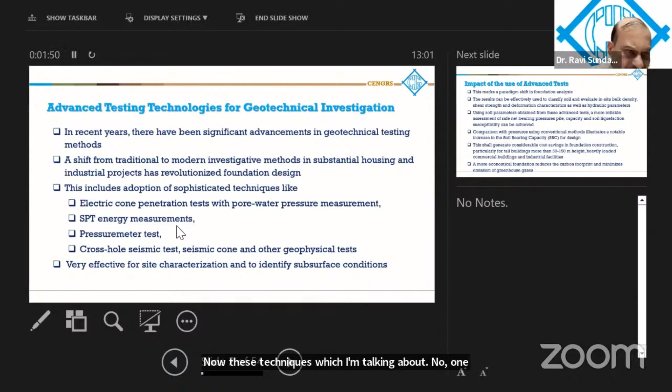These techniques include the electric cone penetration test with pore water pressure measurements, and SPT energy measurements. If you measure the energy being transferred to the SPT anvil, you can standardize it to a 60% energy transfer, normalizing the SPT measurement so the quality and consistency of the SPT improves.

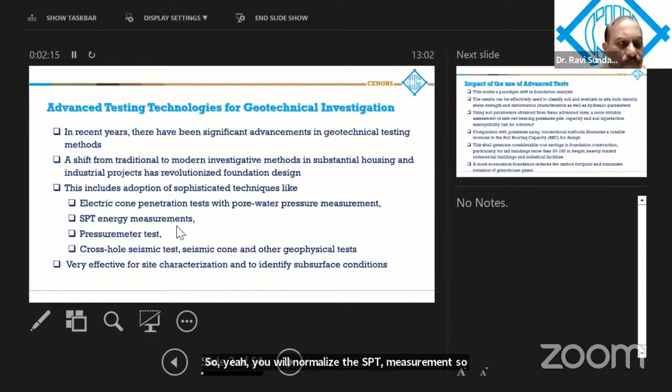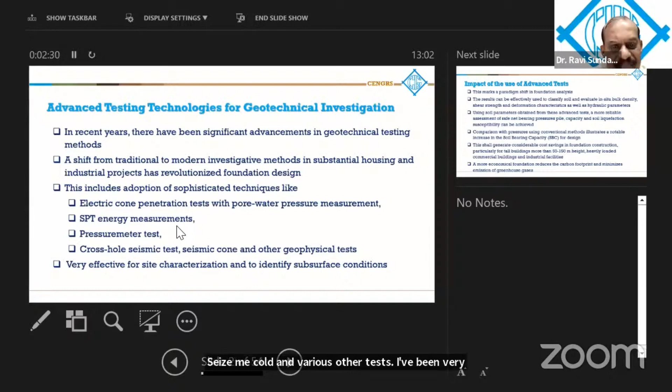Other tests like pressure meter tests, geophysical tests, cross-hole seismic tests, seismic cone, and various other tests have been very effective for site characterization and identifying subsurface conditions.

This has marked a paradigm shift in foundation analysis. The impact of using these tests is that now you can classify soils effectively and evaluate more realistic values of in situ bulk density, shear strength, deformation characteristics, stress-strain characteristics, and hydraulic parameters. Using these parameters allows a more reliable assessment of foundation behavior, including net bearing pressures, pile capacities, and liquefaction susceptibility of the soils, so you can make a much better assessment.

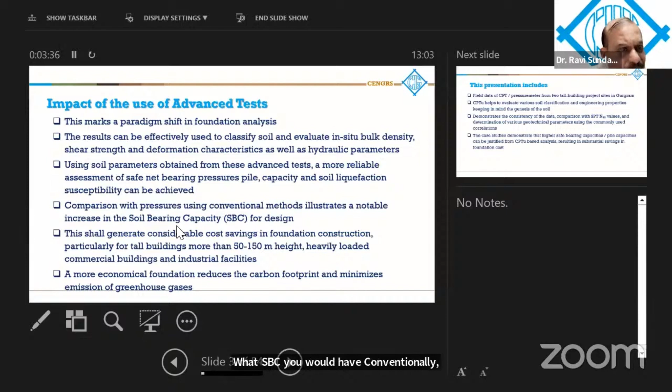If you compare this with conventional methods, the SBC you would have conventionally assessed from normal investigation can show a substantial increase, resulting in cost savings for foundation construction.

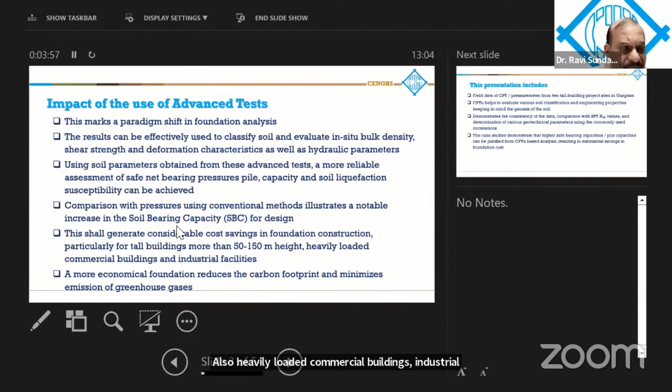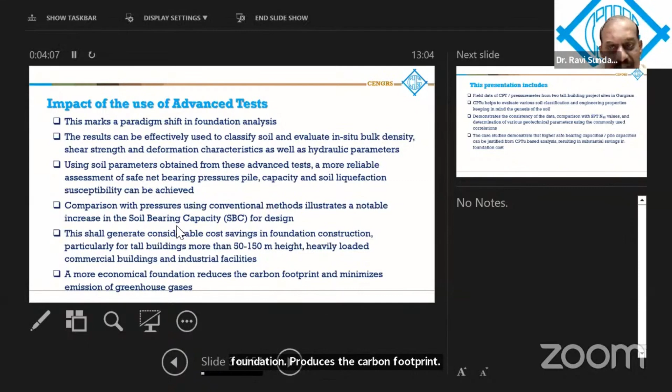In this presentation, I'm going to emphasize tall buildings, 50 to 150 meters high, as well as heavily loaded commercial buildings, industrial facilities, etc. A more economical foundation also reduces the carbon footprint and minimizes the emission of greenhouse gases, so it's a win-win situation.

In this presentation, I'm going to present two case studies with field data of CPT and pressure meter from two tall buildings in Gurgaon. The CPT helps evaluate various soil engineering properties, keeping in mind the genesis of the soil, and it demonstrates the consistency of the data, along with a comparison with the SPT N60, where N60 refers to 60% energy transfer.

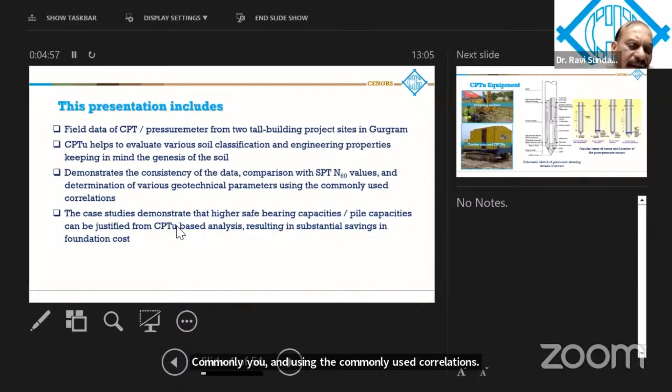This also involves determination of various geotechnical parameters using commonly used correlations. These case studies demonstrate that higher safe bearing capacities and pile capacities can be justified from CPTU-based analysis, resulting in substantial savings in foundation costs.

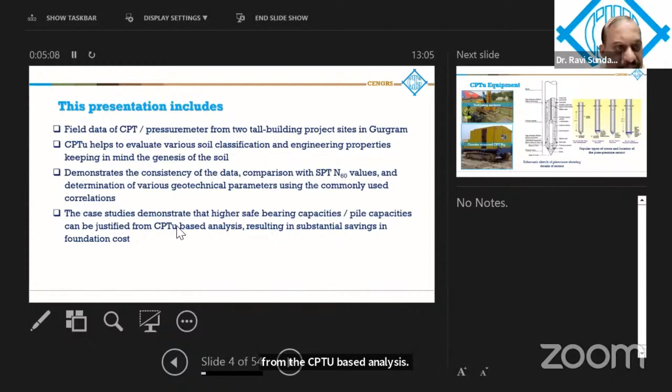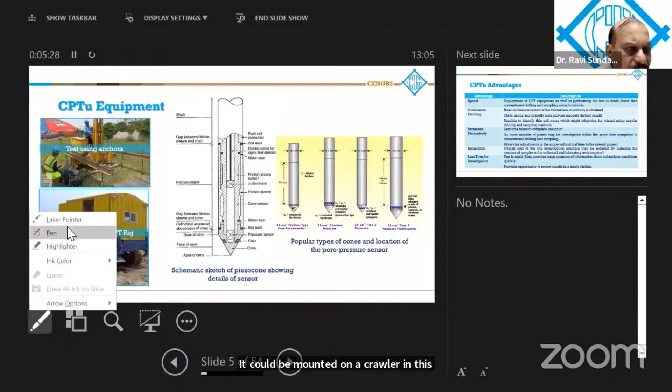So that's the typical CPTU equipment for pore pressure measurement, cone-tip resistance, friction resistance. It could be mounted on a crawler, or you can use anchors to hold down the rig and perform the test. This is the typical piezo cone, and the pore pressure sensor just above the cone is called the U2 position. This is the most commonly used scheme.

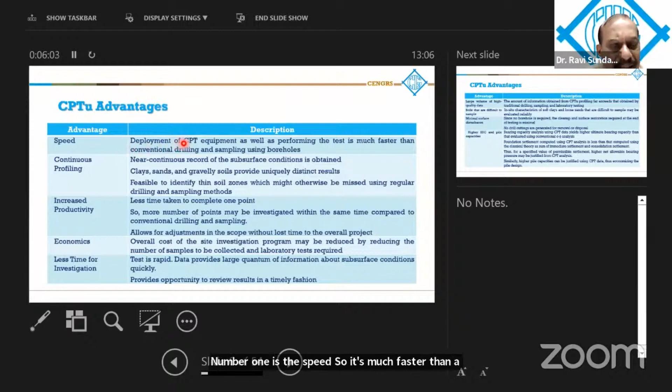So let's see what are the advantages of CPT. Number one is the speed. It's much faster than conventional drilling and sampling using boreholes. You could probably do 2 to even 3 tests a day to 30-meter depth using the CPT, whereas one borehole to 30 to 40-meter depth would take 2 days.

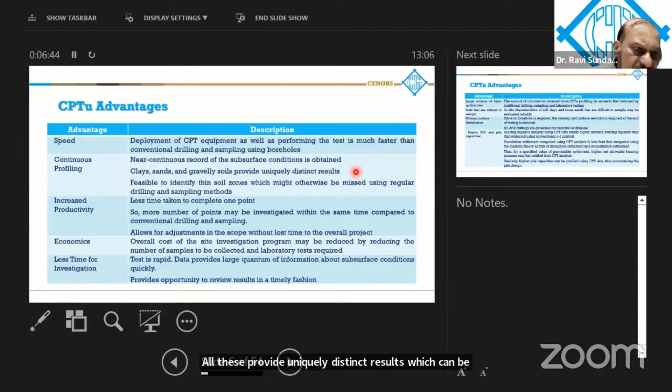You get a continuous profile, a near continuous record of the subsurface conditions, and clays, sands, gravels all provide uniquely distinct results, which can help identify the soil classification. It is feasible to identify thin zones of soil which might otherwise be missed out using drilling and sampling methods.

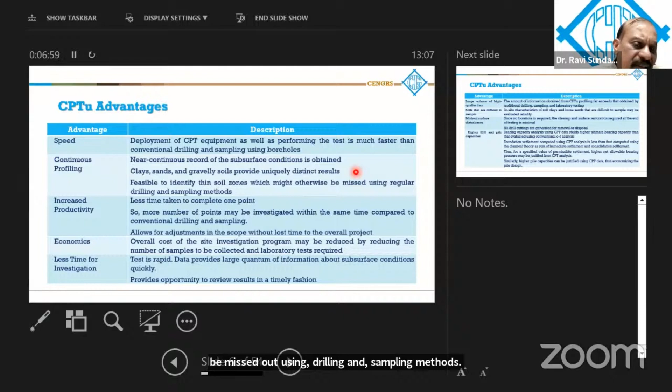Because there is increased productivity, there's less time to complete each point. So within the same time, you can investigate more points and get more data than you would conventionally get from a drilling and sampling operation. It allows for adjustments in scope without loss of time for the overall project.

Economics—obviously you're saving a lot of money by getting more data at lesser cost and lesser time for investigation because the test is rapid. It also provides the opportunity to review the results in a timely fashion. If any remedial measures are to be taken, quick decisions can be made.

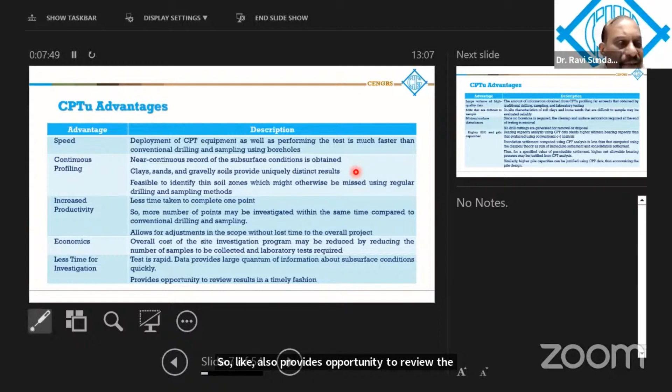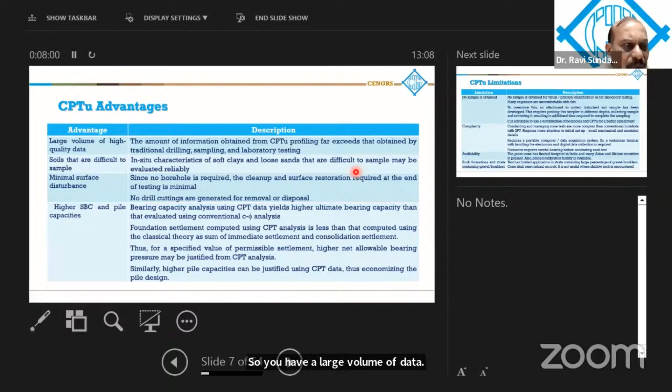So you have a large volume of data that helps you get better quality data. Then we talk about soils which are difficult to sample, like soft clays and loose sands. You cannot get undisturbed samples in these type of soils easily, so you can get the properties very reliably.

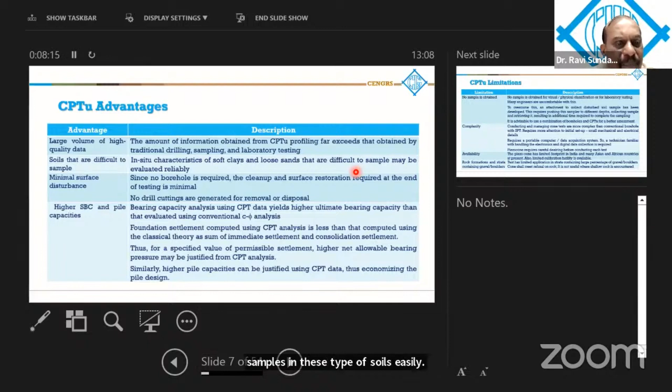There's minimum disturbance to the surface since there is no borehole. No cleanup and surface restoration is required, as it's minimal. No cuttings or drill cuttings are generated for removal or disposal.

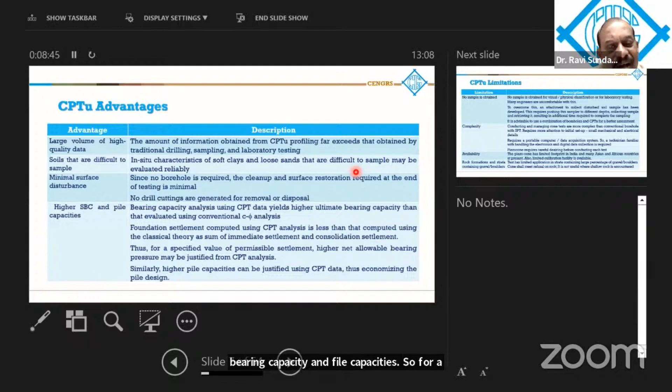And the biggest advantage, of course, is higher bearing capacity and pile capacities. So for a specified value of permissible settlement, you can justify higher net bearing pressures. Similarly, higher pile capacities, so you can economize your design.

Of course, every test has its limitations. No sample is obtained—that is a problem which many engineers are not very comfortable with. To overcome this, an attachment to collect disturbed samples has been developed.

With the CPT pusher, you can push the sampler to different depths and collect some samples. This can help you in getting the soil classification—you can actually see the soil and make sure you've got the right type of soil. Overall, my advice is that you should use a combination of boreholes and CPTU for a better assessment.

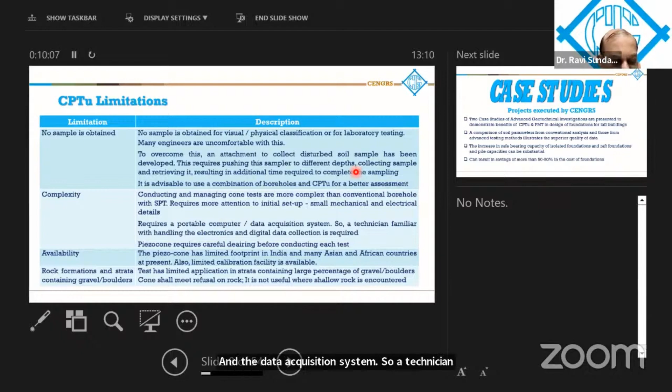It's slightly more complex than the conventional borehole, so it requires more attention to the initial setup. There are a lot of small mechanical and electrical details which have to be taken care of. It requires a portable computer and a data acquisition system, so a technician familiar with handling the electronics and digital data collection is required. Of course, the current generation is usually comfortable with computers.

A piezo cone requires careful de-airing before conducting each test—you would have to de-air your cone before doing the test. Availability is an issue; very few companies in the country have the test. But availability is growing, and very soon there should be quite a few companies worldwide having the right kind of equipment. Also, limited calibration facilities are available, so that is a matter of concern. Again, we hope the calibration facilities will increase.

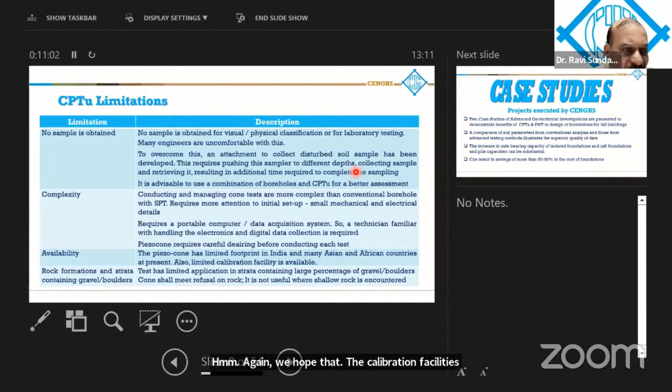Rock formations and strata containing boulders—the test has limited application because you will not be able to push the cone through hard rock or boulder strata.

So I'll start with two case studies, the purpose of which is to demonstrate the benefits of CPTU and pressure meter in design of foundations. A comparison of soil parameters from conventional analysis to those from advanced testing methods illustrates the superior quality of data, increase in safe bearing capacity of isolated foundations and raft foundations, pile capacities, etc. This can be substantial—the saving can be more than 50 to 80%, in cases even more.

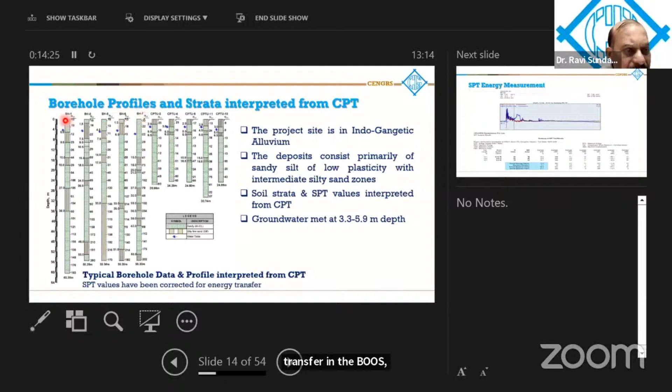So all these SPT values are corrected for energy transfer in the boreholes, whatever the actual SPT values were measured. These numbers are showing these are corrected for energy transfer, standardized to 60% energy transfer.

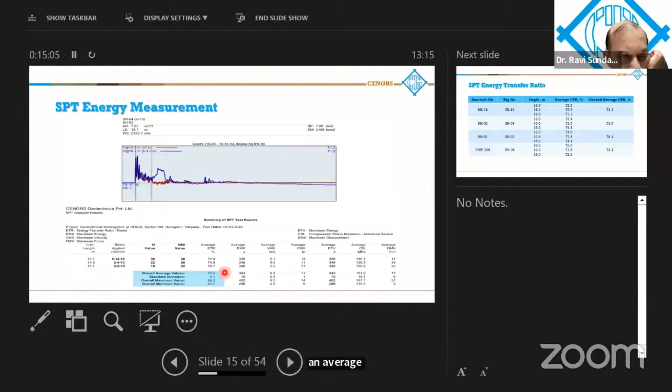So this is the way the SPT energy measurement record looks like. At different depths, if you can see here, 13.1, 14.5, 15.7 meter depths, the SPT was measured, and the energy transfer has been measured for each blow, and then an average value with standard deviation has been determined. Overall average value here was 73.5.

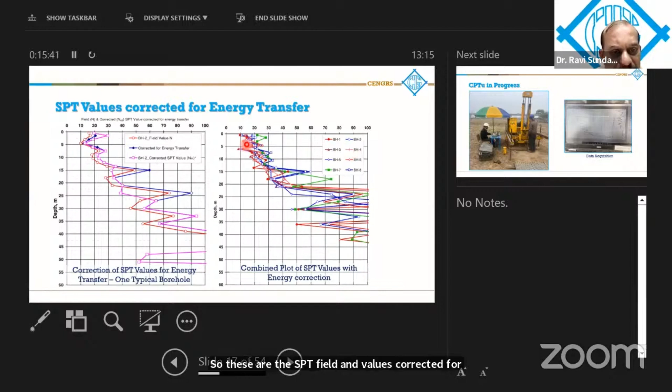Since we used 4 rigs here, all of them were actually monitored. So for the four rigs, these were the SPT results, the energy transfer ratio, roughly 73 to 75%. So these are the SPT field N values corrected for energy, and the combined plot of all the SPT values. You can see the trend is fairly reasonable.

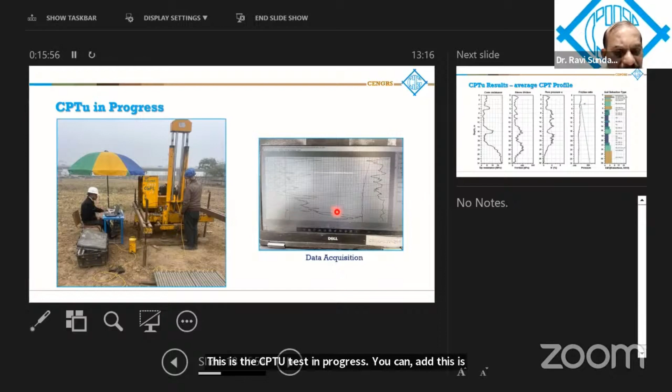This is the CPTU test in progress. This is the data acquisition being done here, and you can see the graphs which are generated by the system.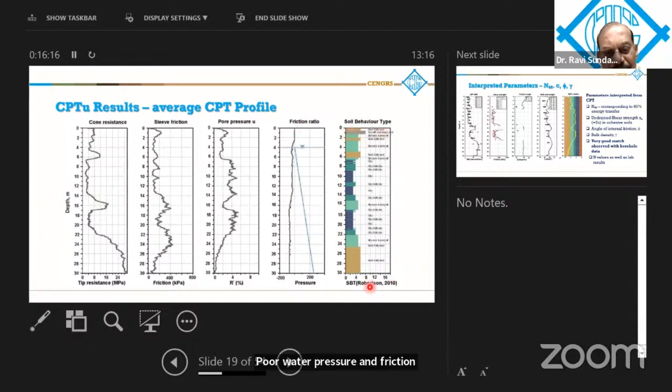So from the various CPT tests, an average profile was developed. This shows me the cone tip resistance, sleeve friction, pore water pressure, and friction ratio versus depth, and the interpreted soil type here. Basically, Robertson's correlations are used to assess the soil type. So from this, we have interpreted the values of SPT N value, shear strength of soil, undrained shear strength, friction angle in the sand layers, and also

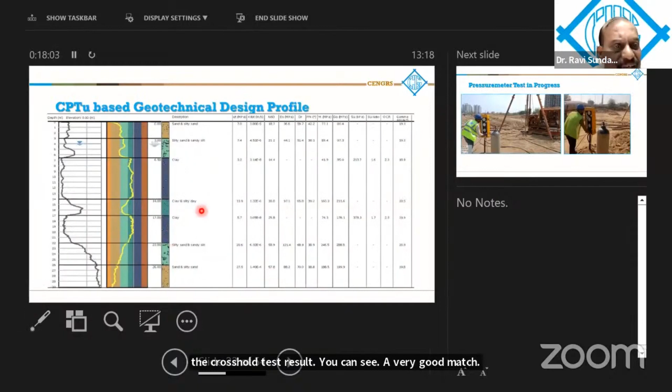So this is the geotechnical design profile developed from the CPT. These are the various layers which have been identified and the various soil properties.

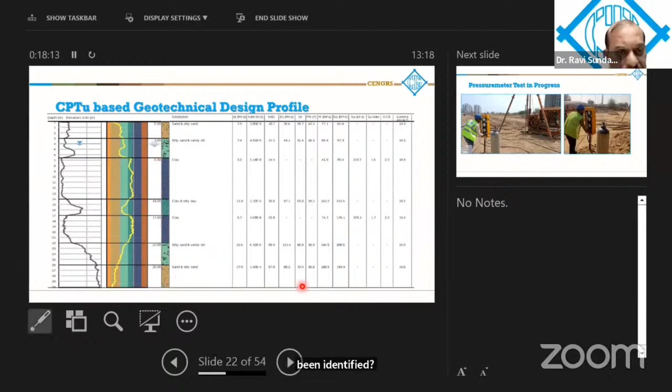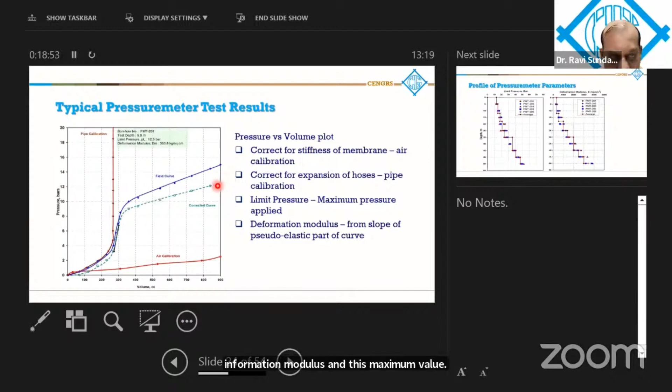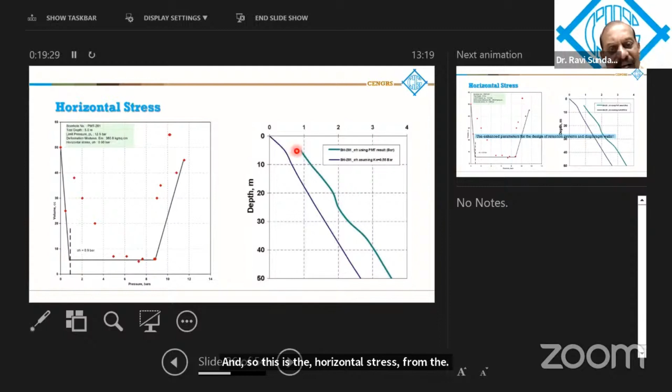Also, you can determine the horizontal stress from the pressure meter, in which you would plot the creep volume versus the pressure. So this is the horizontal stress from the pressure meter. We did a plot of the pressure meter parameters, that is K0, assuming K0 is equal to 0.55, and the pressure meter predicted slightly higher values of horizontal stress.

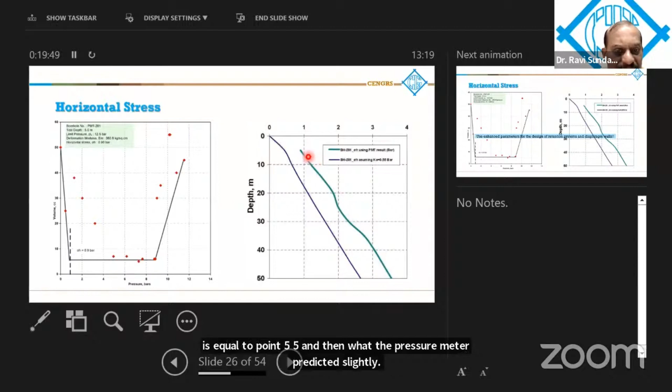So these parameters are used for design of the retention system and the diaphragm wall.

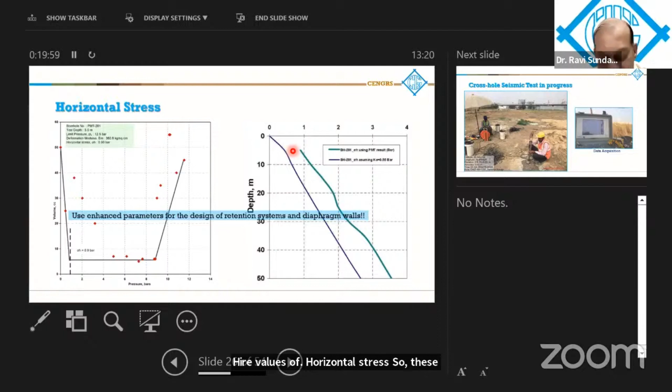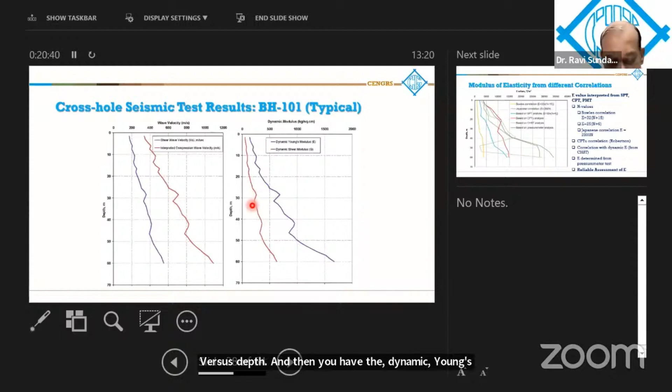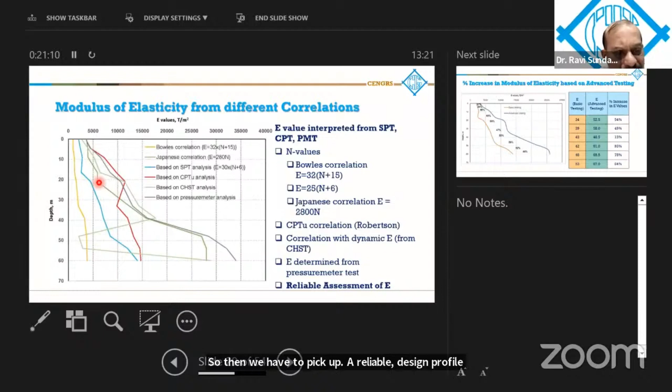The modulus of elasticity has also been determined from various correlations. There are SPT-based correlations, CPT-based correlations, cross-hole seismic based correlations, and also the pressure meter. Based on all these tests, we have a wide scatter of E-values, so we have to pick a reliable design profile closer to the CPT and pressure meter to get the design value.

Let us see what is the increase in modulus of elasticity using advanced testing. At shallow depths it may be a little less, but as you go deeper, you have more than 50% increase in the E value when using advanced testing methods. That obviously results in lower settlements.

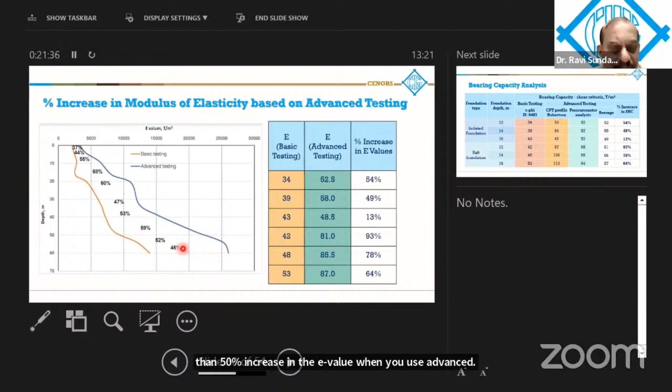So we did the bearing capacity analysis for isolated and raft foundations at 12, 14, and 16 meter depth. This was required because the client was considering making 3 to 4 basements. So we did the analysis using different methods.

And also, as you go deeper, for different sizes, the increase is substantial.

Now this is the settlement analysis, done at 12, 14, and 16 meters for an isolated foundation of 3-meter width and a raft foundation of 20-meter width. Again, using advanced techniques, the net allowable bearing pressure, even for a 50-millimeter settlement, has increased substantially. As you know, for raft foundations, the permissible settlement has now increased substantially in the code to 75 to 125 mm, so obviously these values will go up.

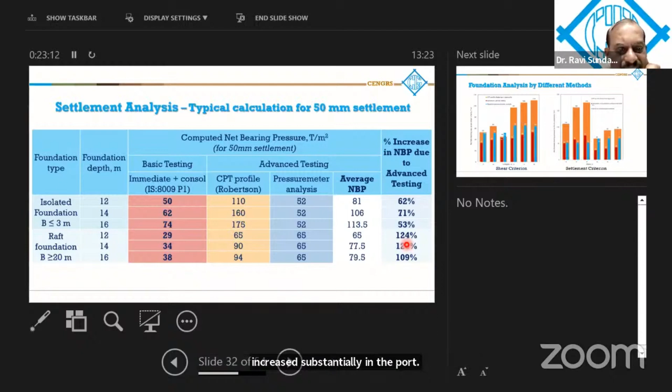So this is the bar chart showing the shear criteria and the settlement criteria, showing how much advantage you can get from the use of advanced testing methods.

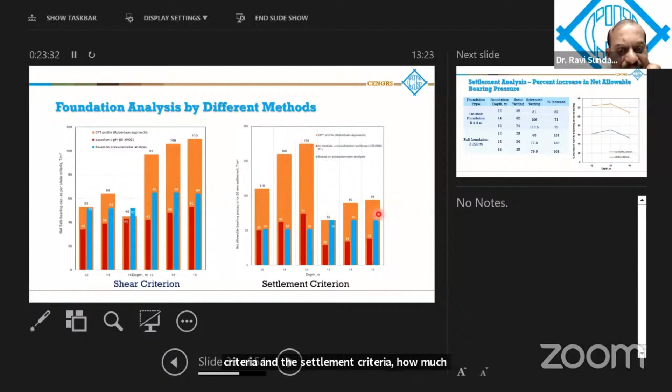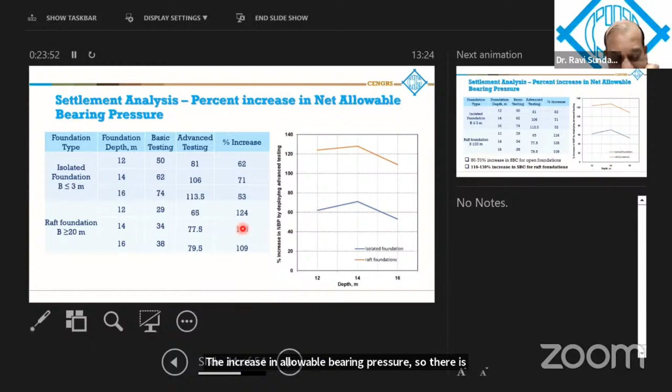If you plot the increase in allowable bearing pressure versus depth, there is more than 60% to up to 128% increase in the values. This kind of increase obviously results in huge economy.

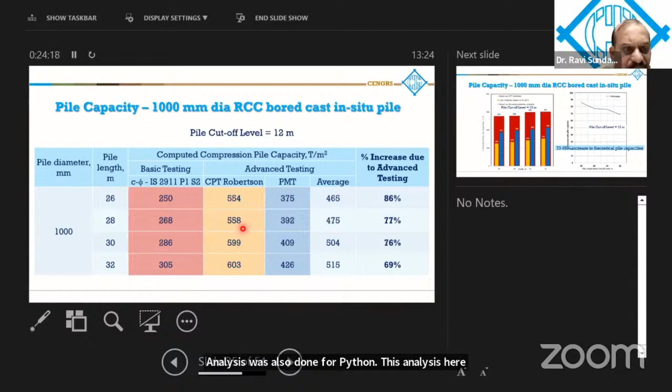Analysis was also done for pile foundations. This analysis shows the pile cutoff level at 12 meters. From basic testing to advanced methods, looking at the average numbers here, there is more than 70% increase in the pile capacity for pile lengths of 26 to 32 meters, 1000 mm diameter.

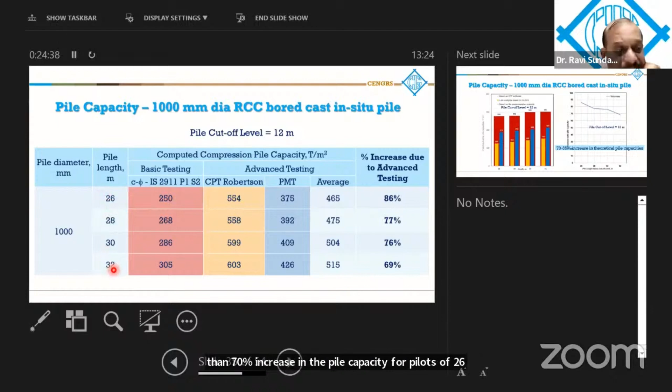This shows a bar chart of the increase in pile capacities from the different methods. So I get a 70 to 85% increase in the theoretical pile capacities.

Obviously, this would have to be proved out by laboratory testing and pile load testing, so you actually know how much capacity you can stretch your pile. The conventional approach has been that as long as the theoretical safe capacity is lesser, and the load test shows the pile settling a very small amount at that stage, there is obviously a margin to increase, so there's a theoretical basis to justify the higher capacity.

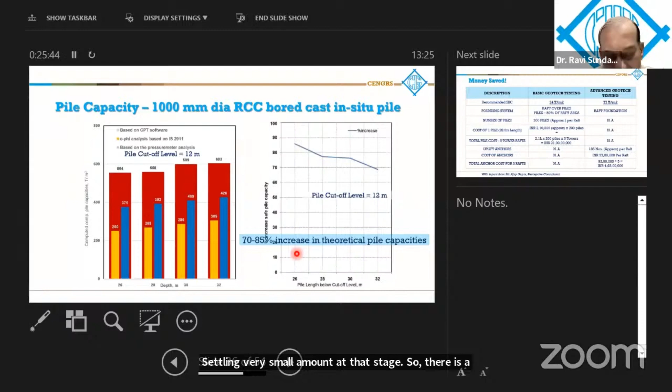So all this transfers into money saved. If we were to do a basic testing, you would have had to go for piles. If I go for a 28-meter long pile...

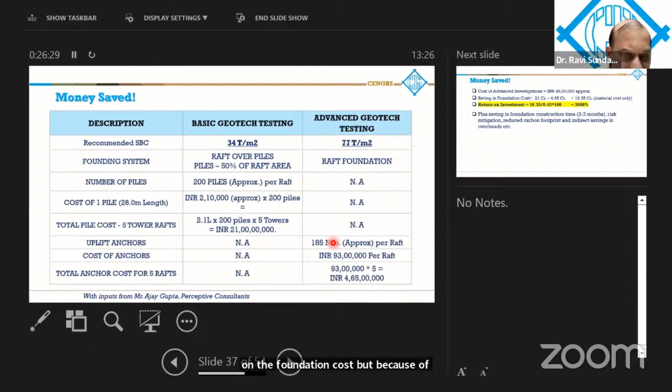I have a cost of more than 21 crores here. Whereas if I were to go for advanced testing, I saved quite a bit on the foundation cost. But because of uplift, because the groundwater is shallow, some anchors were required. About 4 crores were required for the anchors. So the difference would have to be considered as the actual cost. And the cost of the advanced testing was about 45 lakhs. So if you were to look at the net saving, the return on investment is more than 3,600%. It's a huge saving.

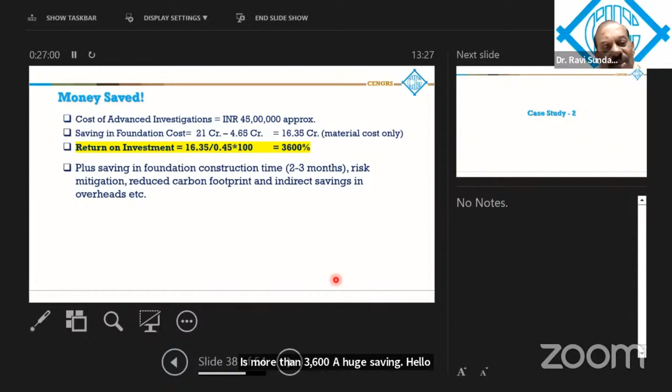Plus, in addition to the saving in foundation cost, there is a saving in construction time. You saved about 2-3 months because you didn't need the piles. There is risk mitigation because you know that you are doing it right. Again, reduced carbon footprint, indirect savings, overheads, etc. So we're talking of huge savings which can be achieved by doing these tests.

I move on to the second case study. This is also in Gurugram. This is a premium housing complex having 7 towers, ground plus 32 floors, 2 basements. The height of the towers is about 117 meters. That's an architect's visualization of how it's going to look like. The basement floor depth is 8.4 meters below the finished ground.

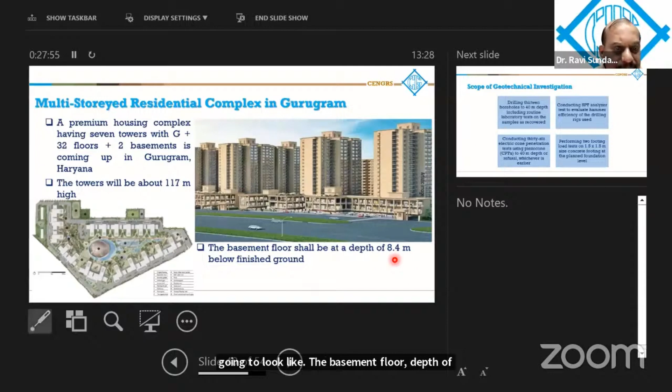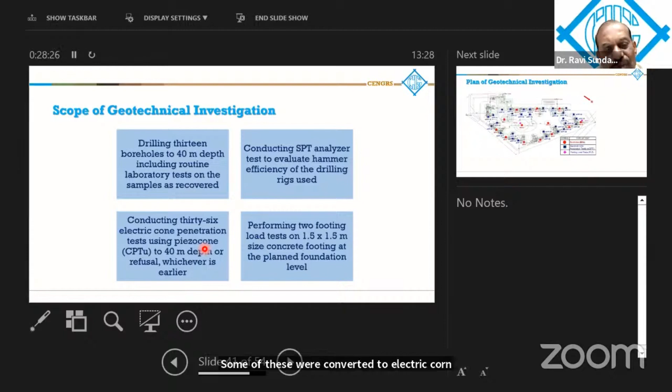So the scope of investigation here: 13 boreholes to 40-meter depth. Again, SPT and energy analyzer to measure the energy transfer. 36 electric cone penetration tests. What was done is economized by, instead of doing more boreholes, some of these were converted to electric cone penetration tests. In addition, 2 footing load tests were performed on a 1.5 by 1.5 meter size concrete footing at the planned foundation level after excavation.

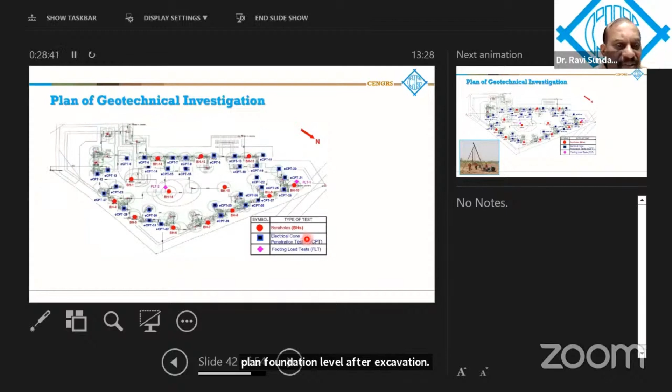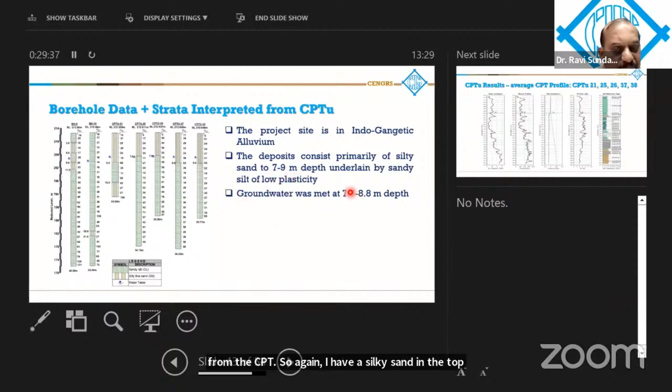So again, here I have the boreholes and the strata interpreted from the CPT. I have silty sand on top, below which I have sandy silt of low plasticity. Groundwater was there, 7.5 to 8.8 meter depth.

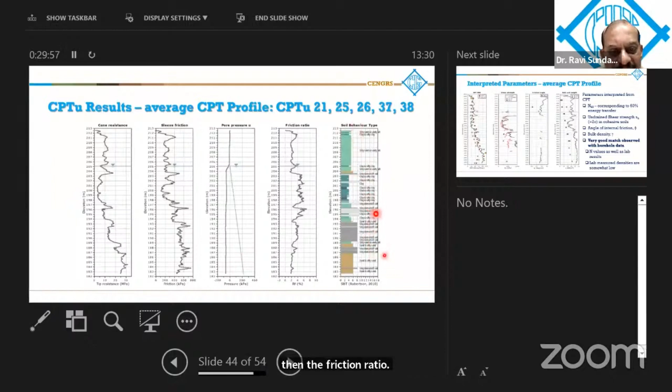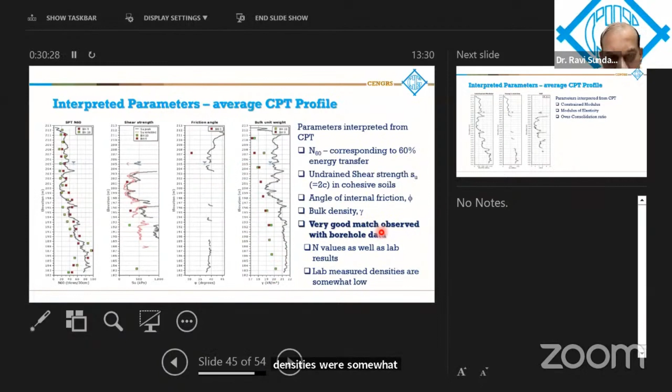This is the CPT results, the average profile: cone resistance, sleeve friction, pore water pressure, and then the friction ratio. This is the soil behavior type. This is the soil classification, which is interpreted from the CPT. Again, the SPT values have been overlaid on the CPT for comparison. The shear strength, whatever was determined from the laboratory tests, the friction angles, the bulk density values - here these bulk densities were somewhat lower, but overall reasonable match. Again, constrained modulus, Young's modulus, over-consolidation ratio - all these parameters have been determined.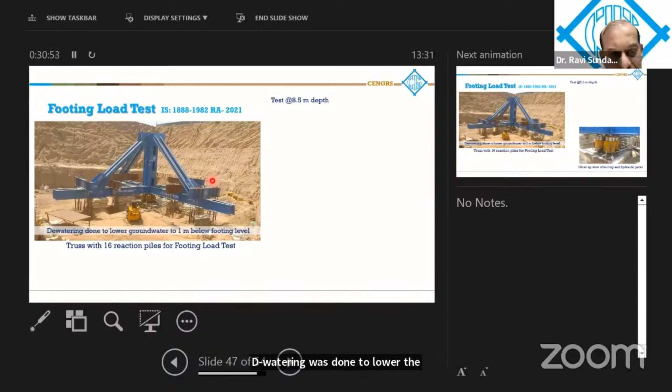This is the footing load test being done using a truss. 16 anchor piles were used for the footing load test. Dewatering was done to lower the groundwater level 1 meter below the footing level. This is the close-up view of the hydraulic jacks. So this truss is capable of supporting a load of up to 600 tons.

These 600 mm diameter bored piles were used as anchors. These were extending to 13-meter depth. The top 4 meters was filled with sand, compacted to approximately the same density as the surrounding soils, so that it does not influence the pile settlement. The concrete was below 4 meters. Each reaction pile was designed to withstand a pull-out load of about 34 tons. The reinforcement of the piles was welded over the girders placed on the truss so that the reaction piles are in tension when the footing is loaded.

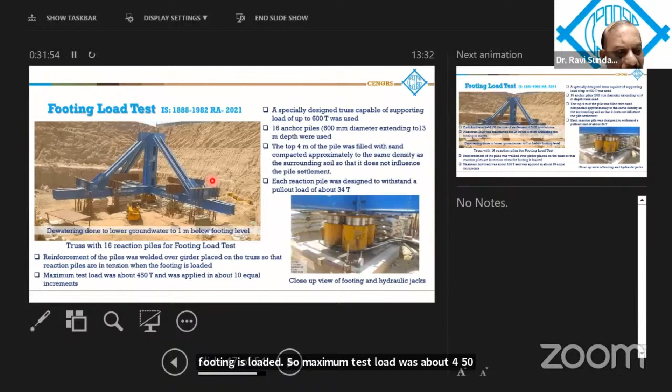So maximum test load was about 450 tons. This was applied in 10 equal increments. Each load was held until the rate of settlement was less than 0.02 mm per minute. Maximum load was held for 24 hours, and then it was unloaded. So dewatering, of course, as I told you, has been done.

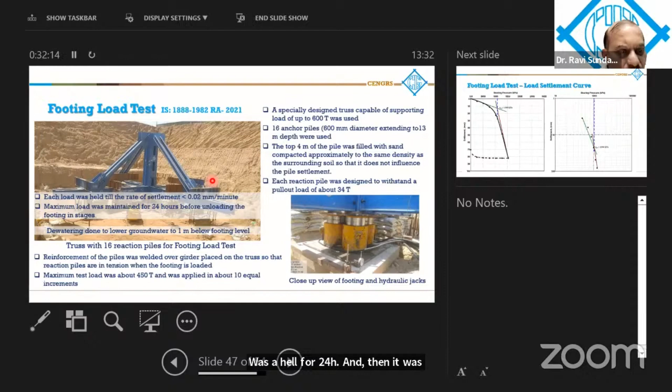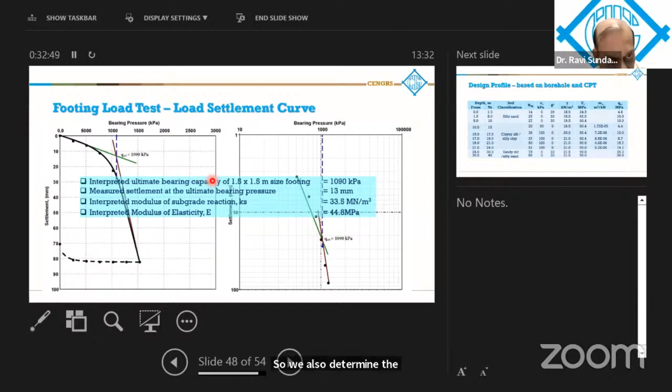So this is the results of the footing load test. The test was carried out up to failure, and from the results we interpreted the ultimate bearing capacity as 1090 kPa. Maximum measured settlement at the ultimate bearing pressure was 13 mm. We also determined the modulus of subgrade reaction and the E values. So this is the design profile developed based on the boreholes and CPT.

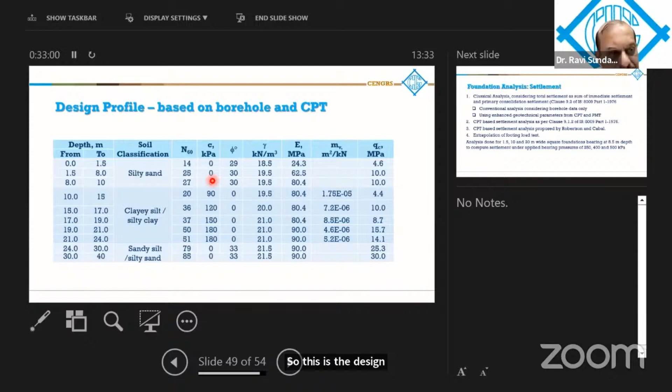So the settlement analysis was done by different methods. The classical analysis considers total settlement equal to immediate settlement plus consolidation settlement. We did two types of analysis: one using conventional analysis with borehole data only, and the second using enhanced parameters from CPT and pressure meter.

The CPT-based analysis is as per IS code, and also done using the method proposed by Robertson and Cabal. Also, the footing load test was extrapolated. We took three cases: 1.5 meter, 10 meter, and 20 meter wide square footings at 8.5 meters depth, to compute settlement under applied bearing pressures of 250, 400, and 500 kPa.

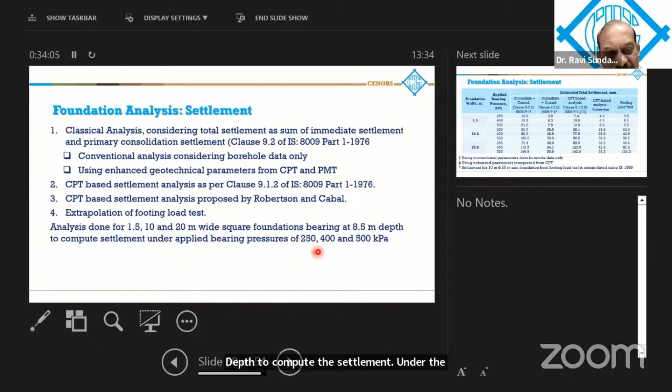If you look at these results for the 1.5 meter footing, which was also 1.5 meter wide, these values are actual measured settlements. If you compare them, there is a very good match with the parameters interpreted from the enhanced parameters, whereas the conventional approach gives much higher settlements. The Robertson-based analysis also gives a very good match. The IS code has a reasonable match, but still not as good as what is predicted by Robertson.

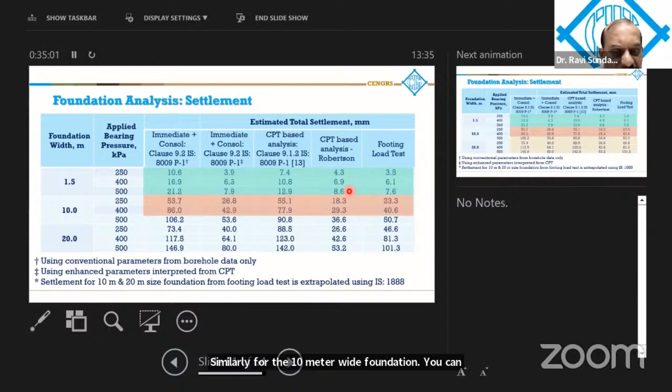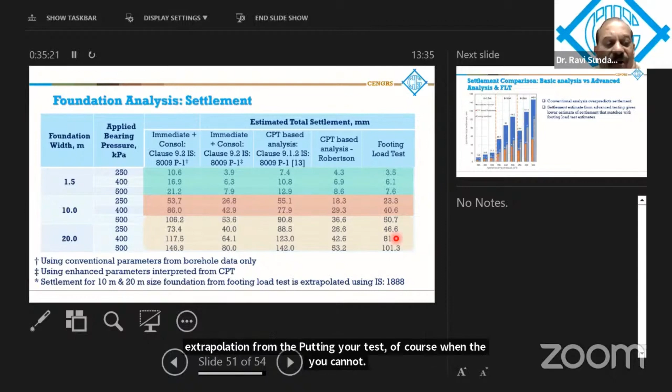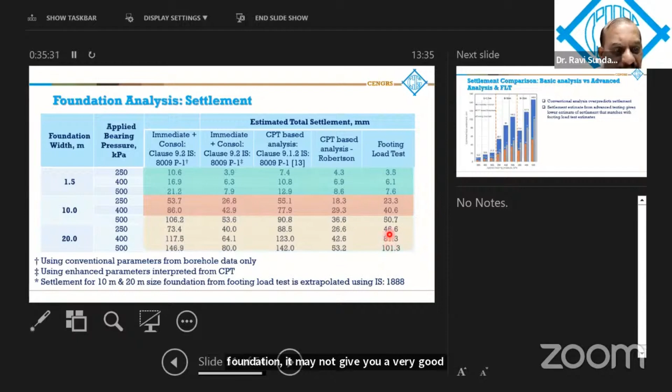Similarly, for the 10 meter wide foundation, the match again for the enhanced parameters is good, and also from the Robertson analysis, and from extrapolation of the footing load test. Of course, if you extrapolate for a 20 meter wide foundation, it may not give very good results because it does not model the soil at deeper depths.

So we did the comparison. This bar chart shows, for the 1.5, 10, and 20 meter wide foundations, how the advanced testing technologies can give lower settlement estimates, which match well with the footing load test estimates.

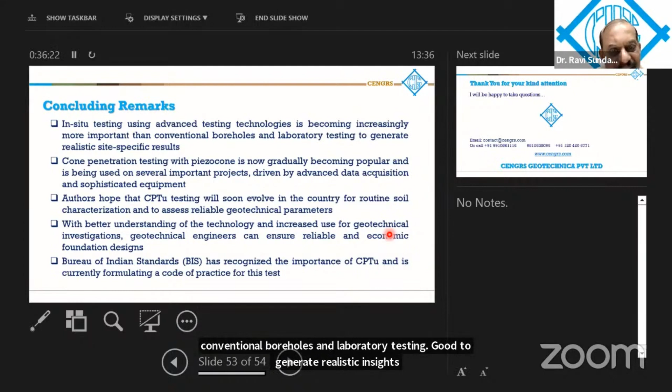So with this, I would like to conclude. In situ testing and use of advanced testing technologies is becoming increasingly more important than conventional boreholes and laboratory testing to generate realistic and site-specific results. Cone penetration test with piezocone digital data acquisition is now gradually becoming popular and is being used on several important projects, driven by advanced data acquisition and sophistication.

We hope that CPTU testing will soon evolve in the country for routine soil investigation and characterization to assess geotechnical parameters. With better understanding of the technology and increased use of geotechnical investigations, geotechnical engineers can ensure reliable and economic foundation design. For your information, the Bureau of Indian Standards has recognized the importance of CPTU and is currently formulating a code of practice for this test.

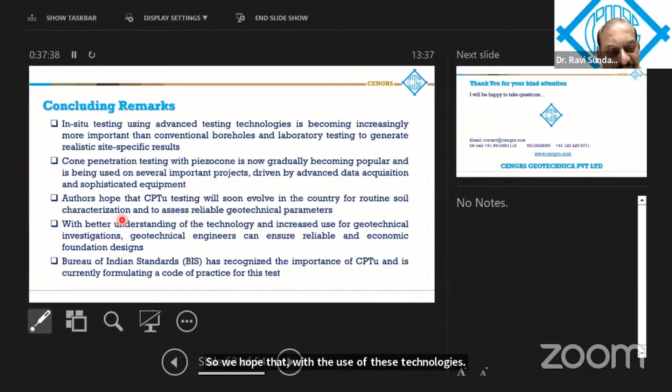SPT energy measurement is also being introduced in the IS code, IS 2131, for the first time, and the draft code is under circulation. We hope that with the use of these technologies, there will be a big revolution in foundation design and a lot of savings in foundation work.

Thank you very much. I hope I have been within the time allotted.